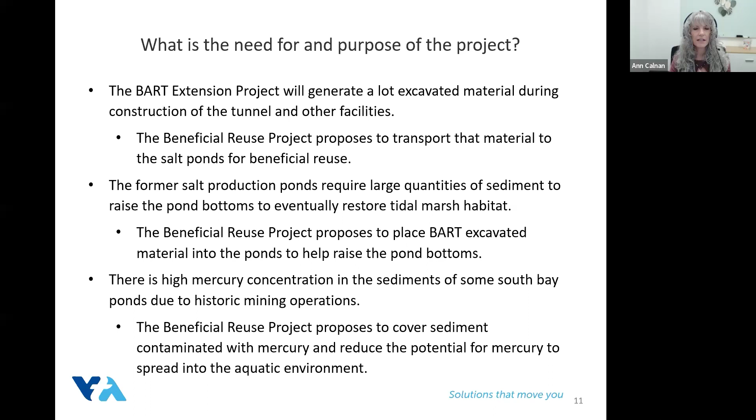As I just mentioned, the material would originate from VTA's BART extension project, which is shown here, and would include the excavated material from construction of the 5-mile-long tunnel and possibly the 3 underground stations in San Jose. Next slide, please.

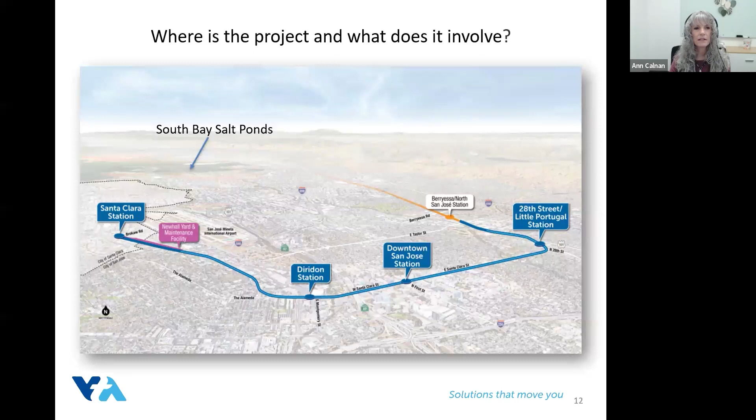The majority of excavated material from the BART extension project would come from the Newhall Maintenance Facility, shown near the bottom of the graphic. The Fish and Wildlife Service and VTA identified only a few ponds in the South Bay for transport and placement of this material. These include the ponds highlighted here. All these ponds are owned by the Fish and Wildlife Service and are part of the Don Edwards San Francisco Bay National Wildlife Refuge, with the exception of Pond A4, which is owned by Valley Water.

Collectively, these are known as the project level ponds because we have identified the precise source of the excavated material, which is the BART extension project. Because we know the source of the material and the approximate amount of the material, which is up to 3.5 million cubic yards, we can conduct a very detailed project level environmental analysis with that information. Next slide, please.

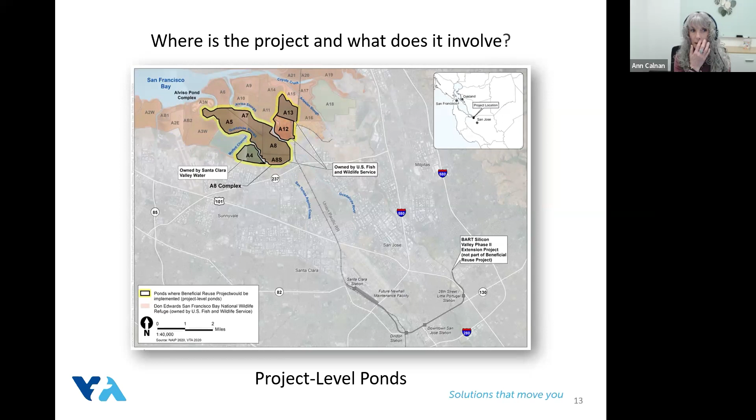The environmental document will also include a programmatic level analysis of transporting to and placing material in all the ponds shown here. This programmatic level analysis will be a high-level analysis for future projects that are yet to be identified. So unlike the project level analysis, where we know exactly where the material is coming from, and we can study specific options for transporting that material and placing it into the ponds, for the programmatic level analysis, we do not have that specific information. We can make some assumptions to do the analysis, but it will be the responsibility of those future project proponents to build upon our document and to do additional environmental analysis when the details of their projects become known.

Now that you know where the material is coming from for the project level ponds, the BART extension project, and we know where it is going, to select ponds in the South Bay, how do we get that material there? Luis is going to explain the hauling options, which include by truck or rail or a combination of the two. And he will also explain the various construction methods that could be used to place the material into the ponds. Next slide, please.

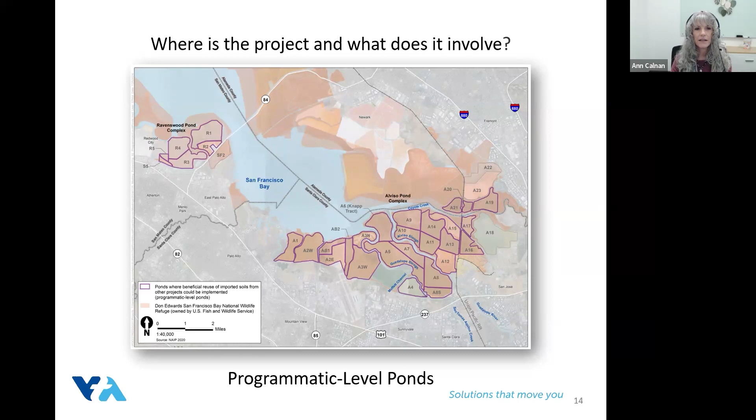Hey, thank you, Anne, and good evening, everyone. Like Anne mentioned, my name is Luis, and I will be discussing the hauling methods, truck routes, material placement methodologies, and infrastructure improvements for the project level ponds. Next slide.

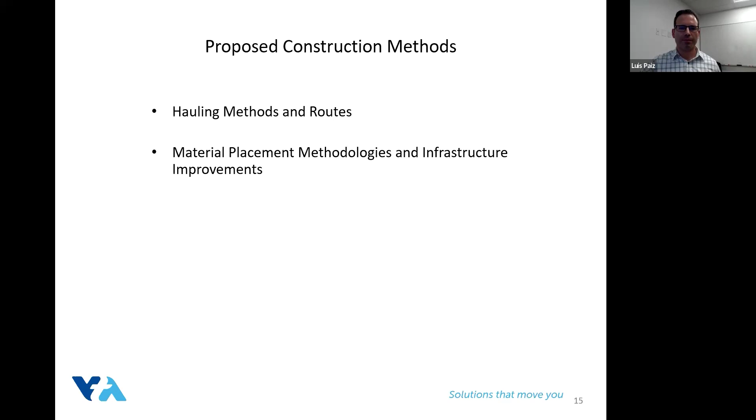So how is the material going to be transported from the BART extension project to the salt ponds? In this visual, the BART extension project is shown by the green rectangles at the bottom right of the slide. From this location, the material is going to be hauled by truck or by rail. The truck route is shown by the orange line, which consists of using Highway 880 to State Route 237 and then to local streets. The rail route is shown by the purple line and consists of a main UPRR line going from the BART extension project to the salt ponds.

From there, spur lines, which are secondary rail lines not served by the main line, will be used to take the material either to Pond A12 or towards Los Esteros Road. These options will be shown in more detail later. Next slide.

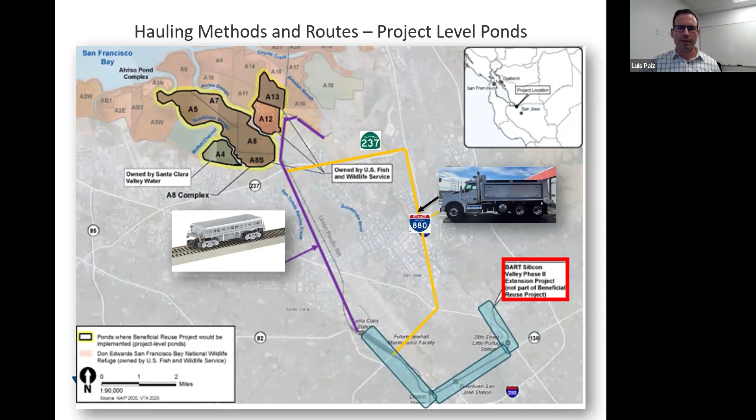This slide shows the haul routes that will be analyzed to transport the material by truck. The proposed haul routes have been selected to avoid residential areas to the extent possible. There will also be a traffic analysis performed that will help determine how we can further minimize impacts to the community. Now I'm going to provide a brief summary of the haul routes that we will analyze. If the material is coming from the BART extension project, which is basically by trucks, all trucks would use SR 237 and then use local streets to reach the project level ponds.

The potential options that we're looking at from right to left are from Zanker Road to ponds A13 and A12. The next option is North First Street to ponds A12, A13, and A8. We could also utilize Gold Street Connector for ponds A8, A12, and A13, and Caribbean Drive for pond A4. Having several options will help us mitigate impacts to the community by reducing the number of trucks for each haul route. This slide also shows the potential offloading areas if the material is coming by rail.

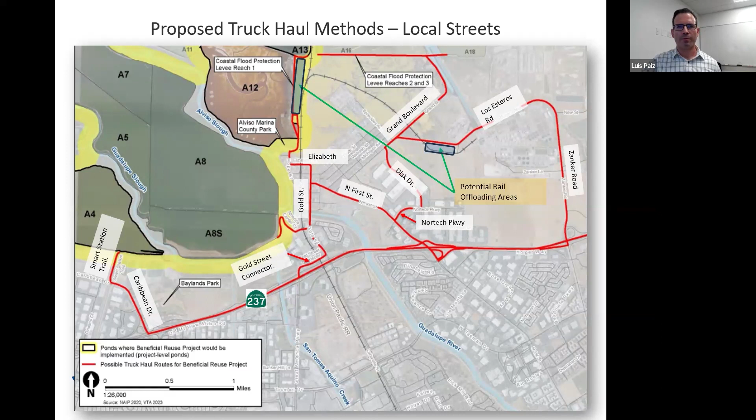Under this option, a new rail spur would be constructed between the UPRR mainline and the pond A12 levee. We would also have to place a temporary fill in this area, as you can imagine, to help facilitate offloading, handling, and transporting of the material.

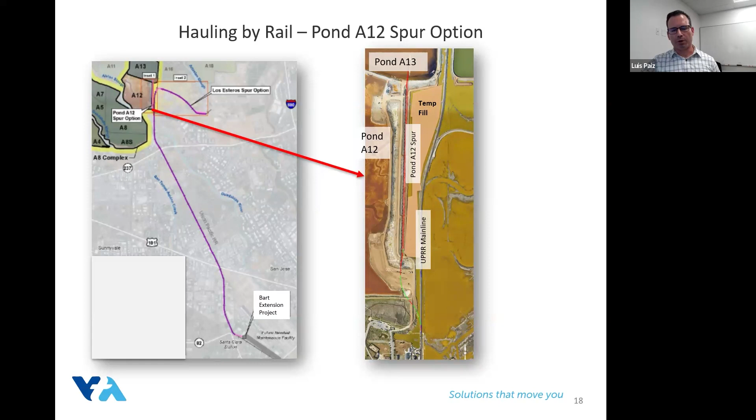From this location, which is a big benefit because we're so close to ponds A12 and A13, the material to these ponds could be transported directly by using a conveyor belt. For ponds A8 and A4, the material will be loaded and transported by trucks. Next slide, please.

Now I'll be talking about the Los Esteros spur option. There is an existing spur across from pond A12 that leads to the regional wastewater facility. You can see this on the right-hand side of the slide. This spur leads to an area south of Los Esteros Road that could be used to offload the excavated material. This area is shown by the blue box on the bottom right of the slide. Next slide.

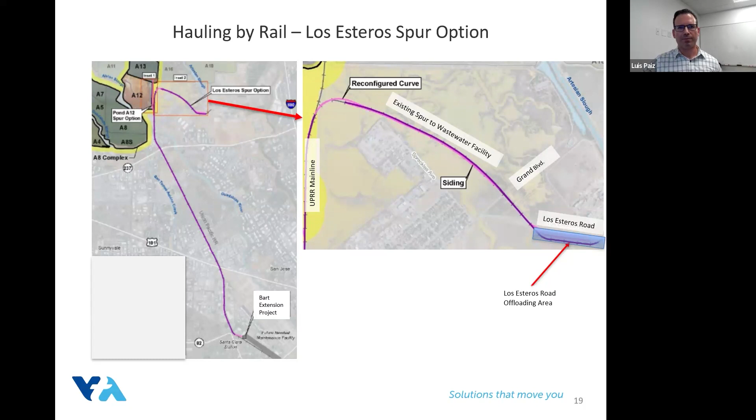This is a close-up view of the proposed offloading area. In this area, a few storage tracks would be constructed to store the rail cars and offload the material. From this location, we could transport the material to ponds A12 and A13 using a very long conveyor belt adjacent to the spur line, or we could load the material into trucks and take it to any of the project level ponds. Next slide.

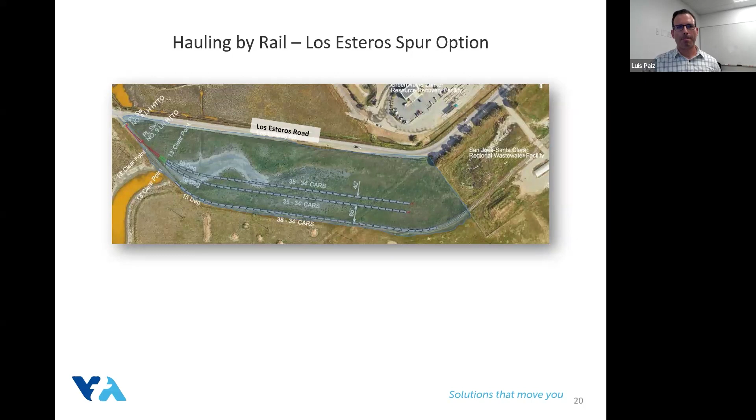So this slide shows a closer view of the existing spur line. For this option, we will need to modify the existing railroad curve between the main UPR line and the spur line to meet current railroad standards. This is shown by the yellow arrow on the upper left of the slide. The bottom right shows the existing spur line crossing Grand Boulevard and Los Esteros Road prior to getting to the offloading area.

Now, to maneuver the empty cars out of the offloading area and bring in the loaded cars, you need 2 tracks side by side to perform this maneuver. For this reason, there is a need to have a siding track adjacent to the spur line. The siding track cannot be built next to the offloading area due to the 2 street crossings, Grand Boulevard and Los Esteros Road, as you can see in the bottom right of the slide.

Because of this constraint, the siding track must be built between the UPR main line and Grand Boulevard. You can see the siding track labeled at the center of the slide. Because of its location, there will also be a need to place additional fill to build this siding track. Next slide, please.

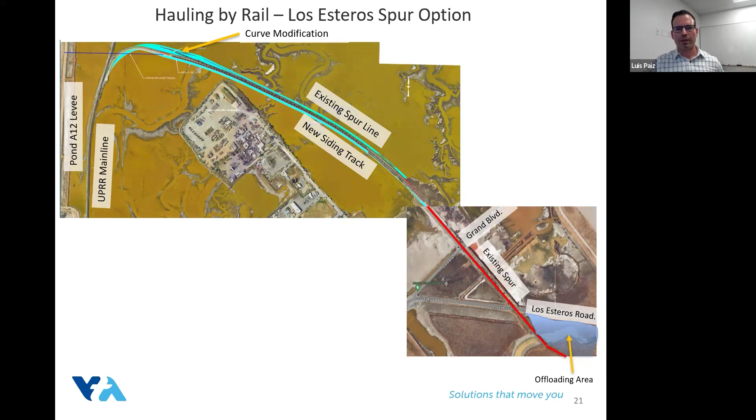And finally, to conclude the conversation of the rail options, there is a need for some infrastructure improvements at the BART extension Newhall Yard maintenance facility. This is the location where the tunnel excavated material will come out and be stored in a storage bin. From this location, the material will be loaded to either rail cars or trucks.

We need to construct a few storage tracks, as shown by the green and red lines, to load the material from the storage bin to the rail cars. But in addition, we also need to build a few rail crossings, as shown by the blue lines, to transport the rail cars from the yard to the main UPR line. Next slide, please.

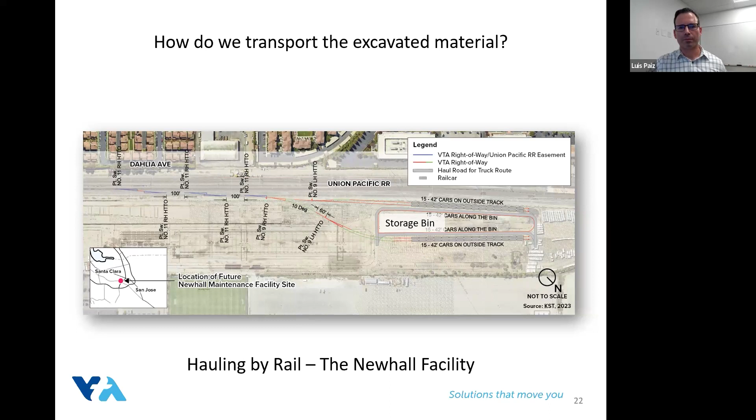Now that we're done showing the transportation methods, I will briefly be discussing the material placement methodologies. We are looking at 3 methods of placement of the excavated material within the pond. The methods include conventional equipment, hydraulic dredging, and a conveyor system. Next slide.

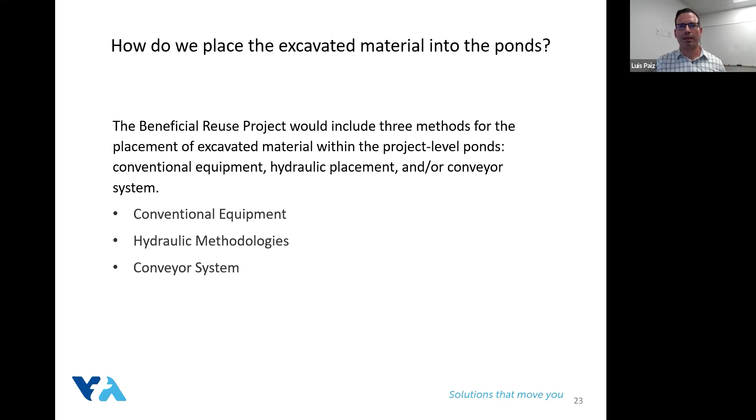Conventional equipment includes the use of trucks, excavators, dozers, amphibious equipment, which basically has wider tracks to work in swampy soils or subsoils, and the use of excavators and modular barges. This slide shows a visual of these types of equipment. For this method, the material will be offloaded near a pond shoreline, as you can also see in this visual, and then the material will be pushed into the pond with a bulldozer.

Long-reach excavators on barges or amphibious excavators will be used to facilitate the placement of the material throughout the pond. The bottom of the slide, as you can see, shows an example of an amphibious excavator. Next slide.

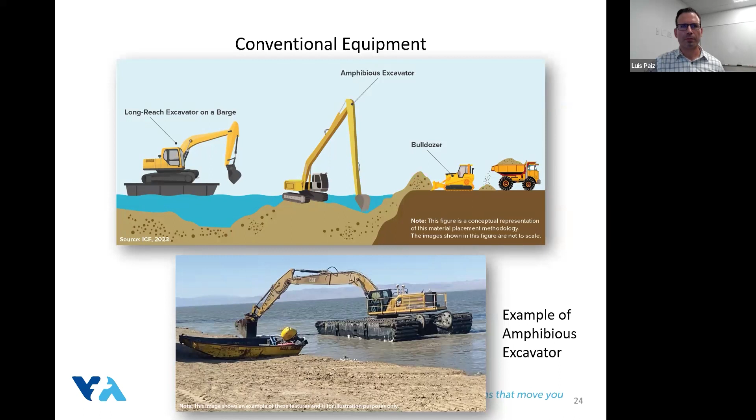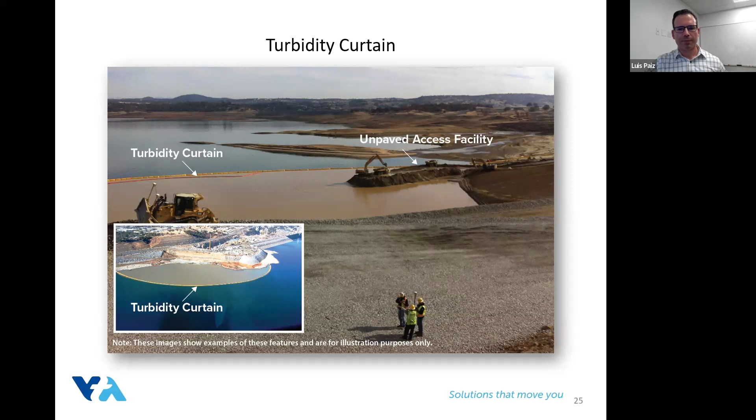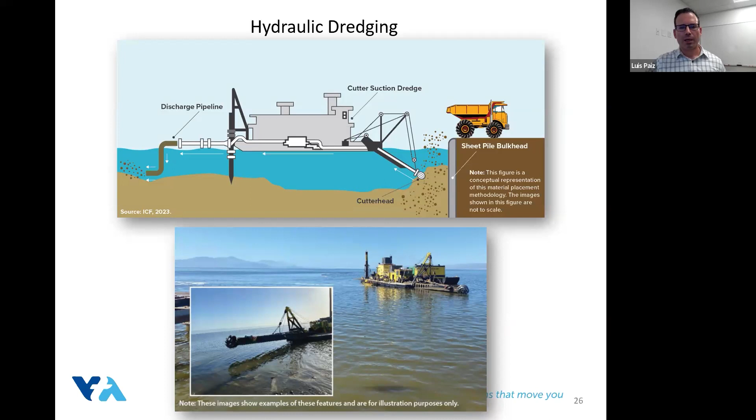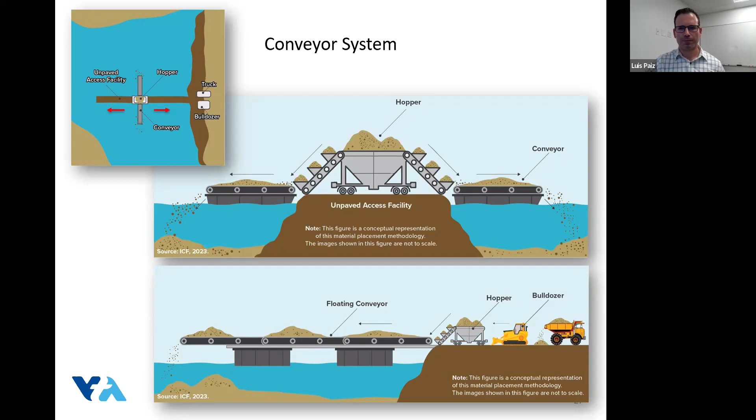Next slide, please. Thank you, Luis. Before any of this material can go into the ponds, it must meet quality assurance criteria to ensure no harm to wildlife or the environment. The Fish and Wildlife Service and VTA are working with the San Francisco Bay Regional Water Quality Control Board and the San Francisco Bay Conservation and Development Commission to ensure that any excavated material meets stringent criteria for placement in the ponds. Next slide, please.

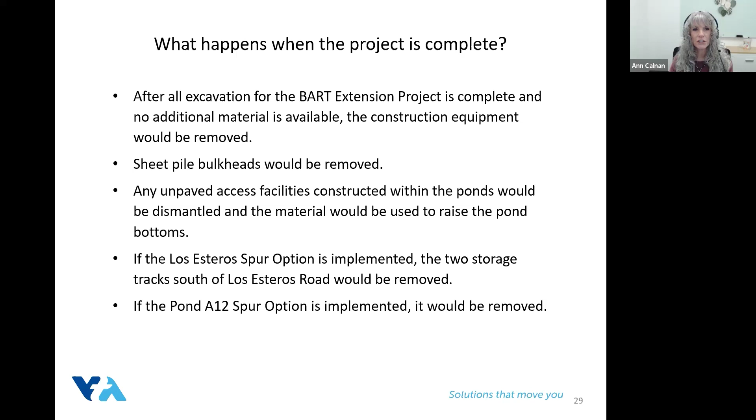So what happens when the project is complete? Basically, anything that is placed into the wildlife refuge needs to be removed once the project is concluded. Whether it be mobile construction equipment or sheet piles, it must all be removed. Any unpaved access facilities, which are the dirt roads that are built within the ponds to allow access for trucks or a conveyor system, would be broken down, and the material would be used to also help raise the pond bottoms. If the Los Esteros spur option is implemented, the 2 storage tracks south of Los Esteros Road would be removed. If the Pond A12 spur option is implemented, it would also be removed at the end of construction. All areas that were subject to these temporary impacts will be restored to pre-project conditions. Next slide, please.

So why do this project? What are the benefits? The initial benefits of transporting the BART excavated material to the salt ponds instead of landfills and quarries is a reduction in greenhouse gases due to the shorter distance from the BART construction site to the ponds. That distance is about 10 miles. Landfills and quarries range from 10 to 42 miles away. Even if we could take all the material to a landfill that was only 10 miles away, you get negligible beneficial reuse by disposing the material in a landfill.

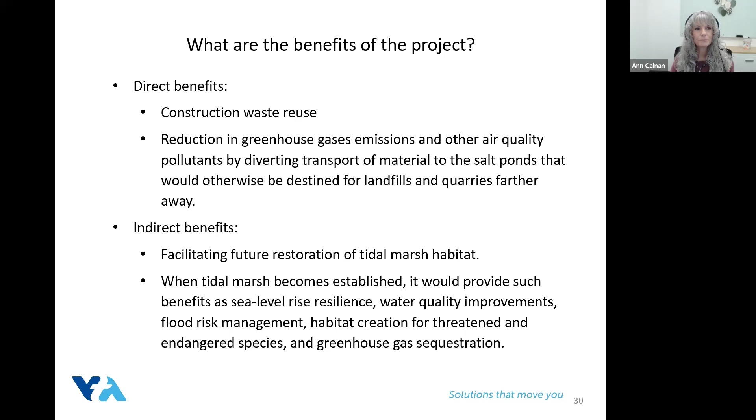As I mentioned before, we are just kicking off the environmental process with scoping to get your feedback on the proposed project. Next, we will do the technical analysis, which will take us to the end of this year. Once the draft EIS/EIR is prepared, we will release it for public review and comment in early 2025. The final environmental document will include both responses to all comments received on the draft and any changes to the draft document based on those comments.

Thank you, Ann. Again, if you do want to leave a comment today, please use the QR code, the project email, or visit the project website, as Ann stated. With about 20 or 30 minutes left in this presentation, we'll probably go for another 5 or 10 if anybody has any other comments. I'm currently seeing we don't have any comments quite yet, but we'll stay on for a little bit longer, see if anybody's going to trickle in with any questions.